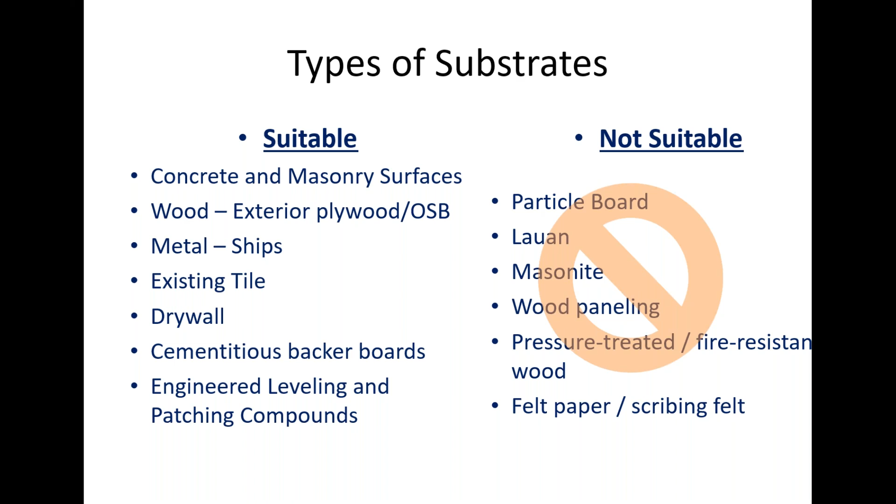What we do not want to install over are particle board, Lauan, masonite, wood paneling, pressure treated or fire resistant wood, and felt paper, scribing felt. For the most part, the reasoning is a lot of those products will swell, they can delaminate, they're not structurally sound, and they're just not suitable for tile installations.

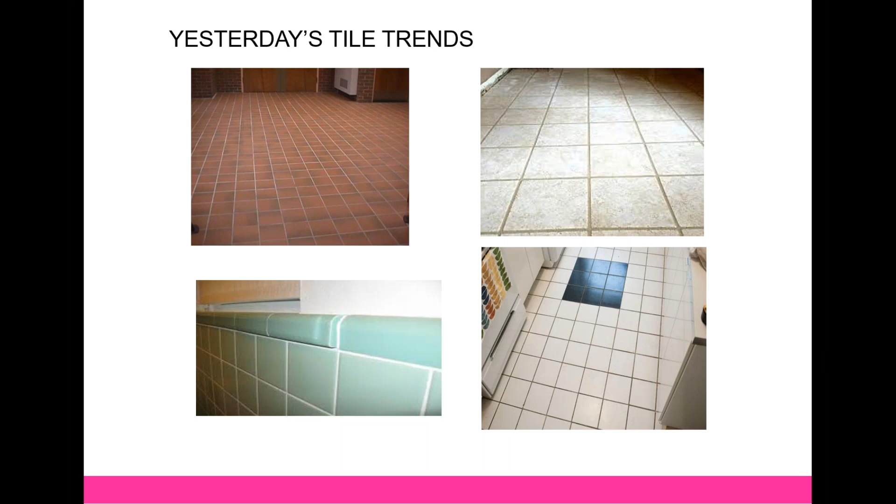So back when I started with my uncle in '94, we installed thousands of feet of 3x3, 4x4, 6x6 tiles on the wall. As for the floors, 8x8s and 12x12s were the norm, and the floors were flat enough to install on. When installing these smaller tiles, the substrates don't necessarily have to be as flat as they need to be today. But nowadays, 24 by 48 inch tiles or even larger are a common sight in production homes and commercial buildings. These tiles need a substantially flatter surface to install over.

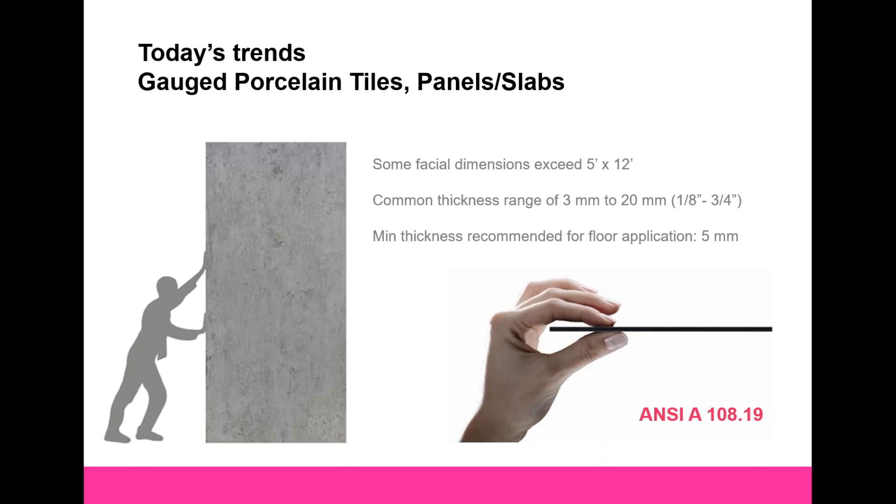The trend is bigger and bigger tiles. Like I mentioned before, we commonly see 24 by 24s, 24 by 48s, even larger tiles being installed in production homes and commercial buildings. Additionally, these tiles are getting thinner and thinner. As technologies improve, the prints are more realistic and tiles are getting much bigger. And as these tiles get bigger, the need for a flatter substrate is even more crucial.

Mortar coverage is even more important as well. We don't want any voids underneath these tiles more than 2 square inches with your mortar. So imagine a chair leg on one of these tiles, for example. That point load over that void, we're reaching 2,000 PSI. And then that one spot can cause a crack to start. And you get a crack in one of these larger tiles, and it's an expensive repair.

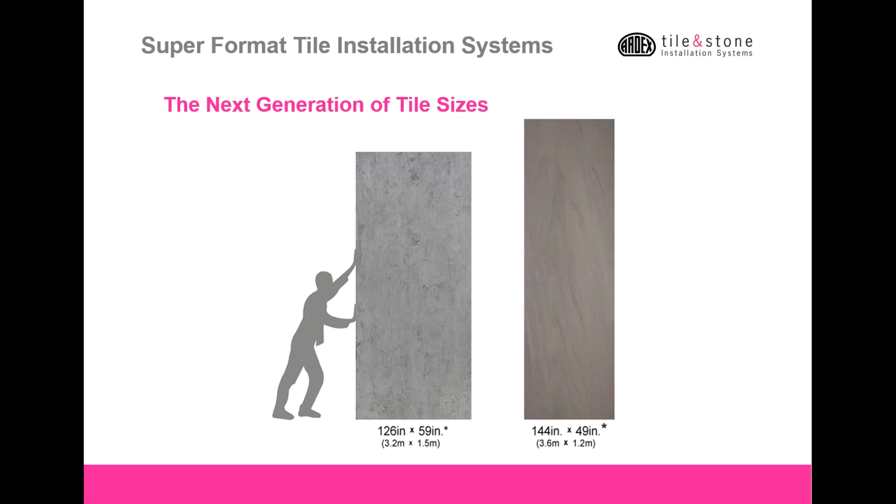So this is why it's so crucial to have a very flat surface and get your mortar coverage. Our standards tell us that we need the substrate to be no more than 1/4 of an inch in 10 feet for a tile installation. For any tile with any edge greater than 15 inches, we need the substrate flatness to be 1/8 in 10 feet, and as you can see here, we also need it to meet 1/16 of an inch in 24 inches. This requirement is in ANSI A108.19.

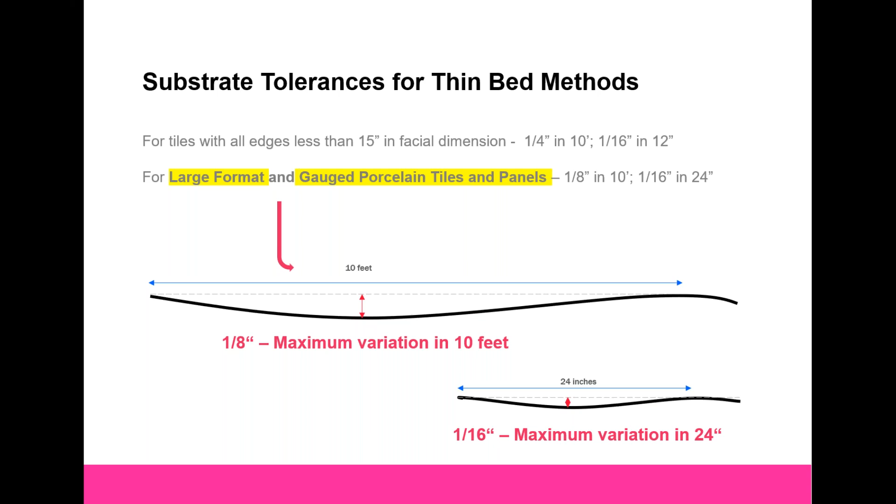Designers are specifying bigger and bigger tiles. Homeowners wanting bigger and bigger tiles. These tiles offer less grout joints, in return requiring less maintenance, less cleaning. These tiles span a greater distance over the substrate, and they do not contour or bend to that substrate like the smaller ones would. So this is another reason why we need a very flat surface to work on.

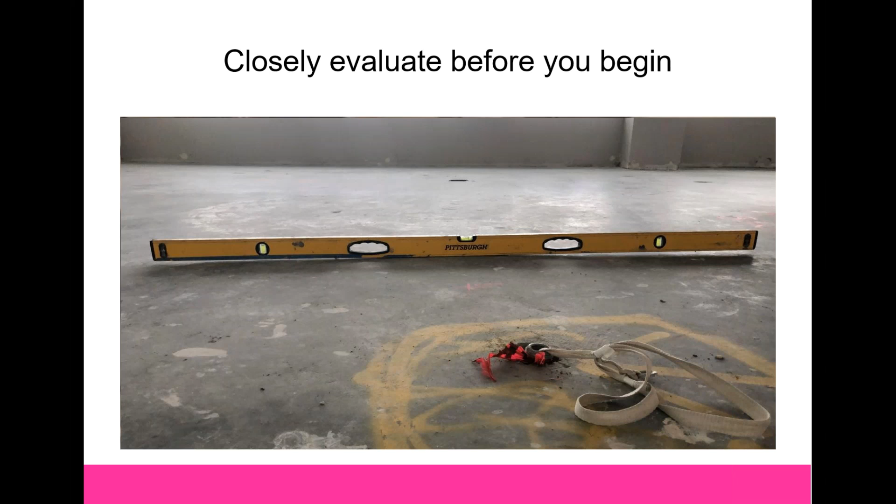By following proper prep guidelines, you will maximize long-term performance while reducing installation costs. More importantly, you will minimize costly callbacks and enhance your reputation as a quality installer.

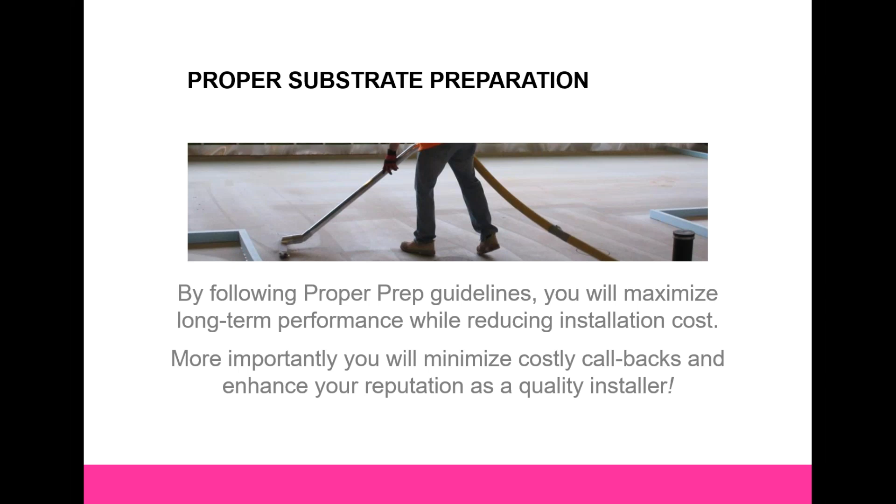Preparation, I should say, reduces perspiration. We have the 5 keys to a successful installation, which are critical. As number 2 is highlighted here, substrate preparation is one of those 5 keys to success.

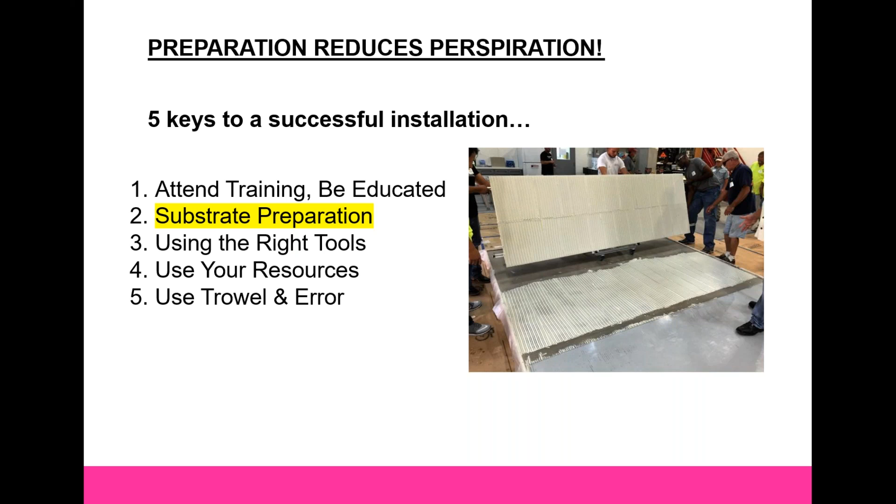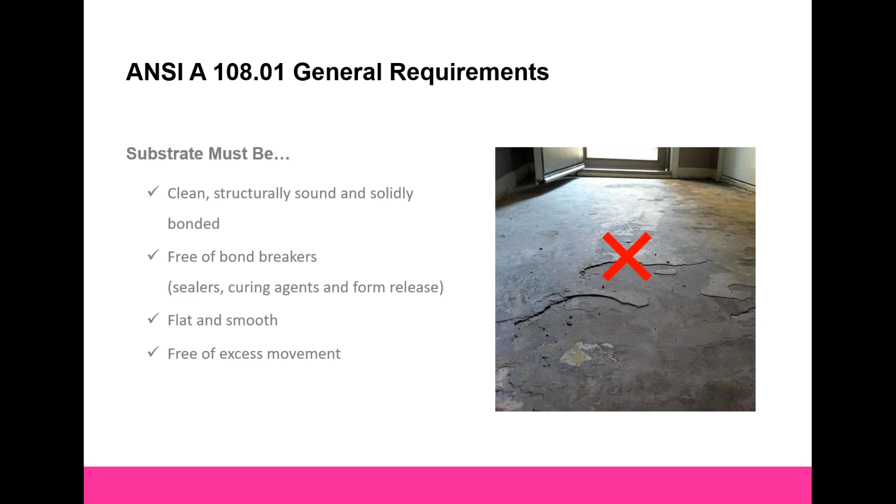The ANSI A108.01 general requirements state a substrate must be clean, structurally sound, and solidly bonded, free of bond breakers, sealers, curing agents, form release. It must be flat and smooth and free of excess movement. Once that is achieved, we are able to just spread the mortar and set tile. Taking the proper steps at the beginning will allow you to install faster and more efficient at the back end of the job. Not to mention, you will be within TCNA guidelines.

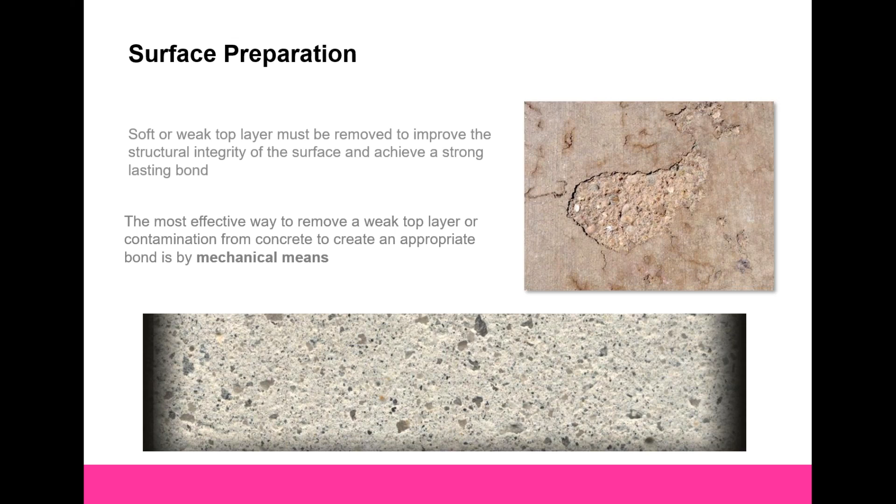We need to get to clean, sound, and solid. Any loose, weak material and soft top layer need to be removed. The most effective way to achieve this is by mechanical means, such as shot blasting and/or grinding. In locations where we have contaminants, we must always mechanically remove them. Release agents, paint, drywall mud, sweeping compounds, oil grease, asphalt tar, etc.

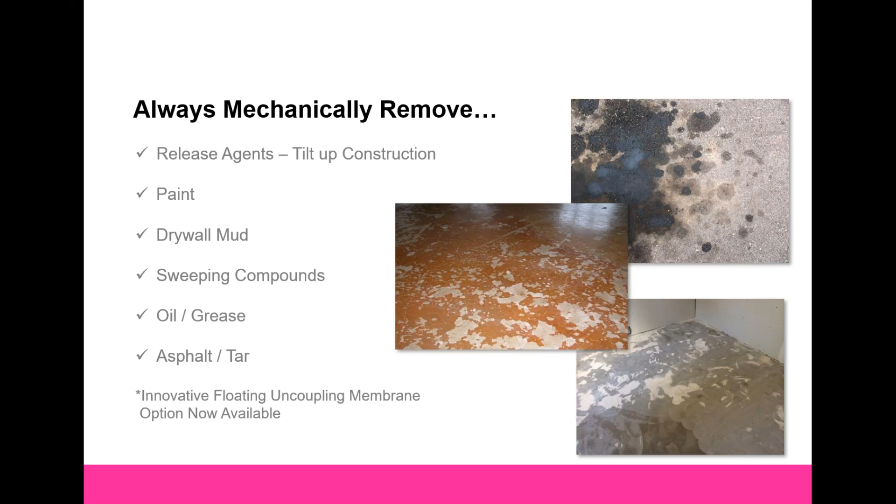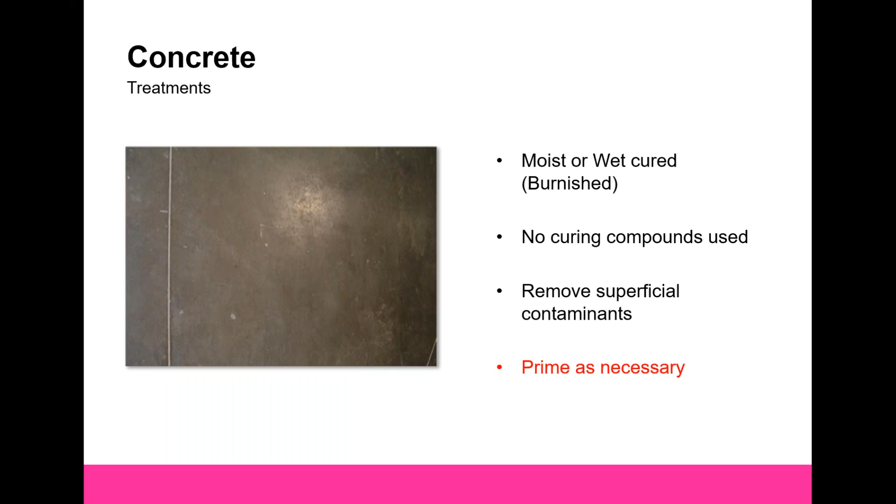Old adhesives, all of these need to be removed mechanically. We don't want to use chemicals. In situations with new concrete, it should be wet or moist cured. No curing compounds used. You should remove any surface contaminants and then use a proper primer if necessary.

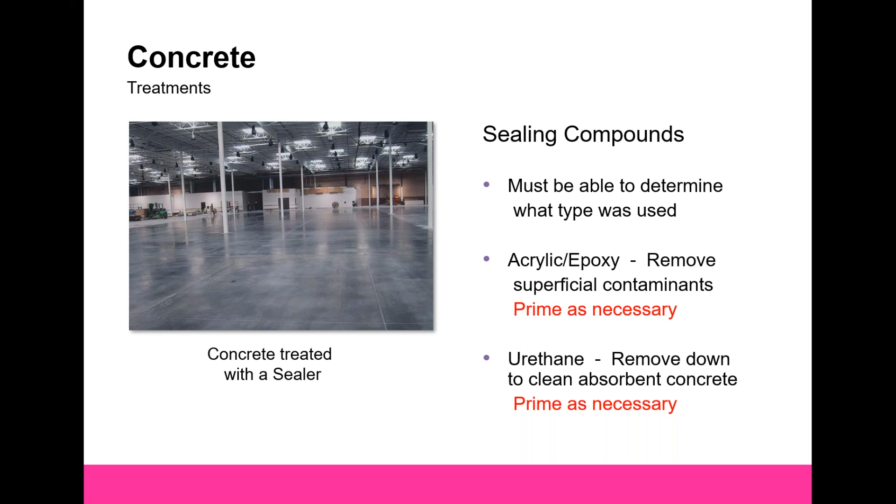If the concrete is treated with a sealer, we must be able to determine what type of sealer that is. Now if it's an acrylic, say, or an epoxy sealer, we just remove superficial contaminants and we can prime as necessary and install over that. If it's a urethane, we will need to remove that down to clean absorbent concrete and then use a primer as necessary.

Sorry about that. Thought I had that on silent. I apologize.

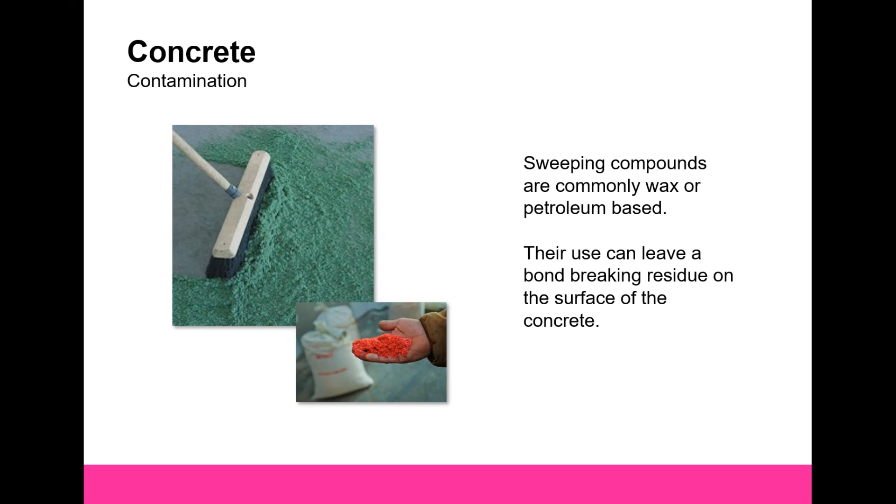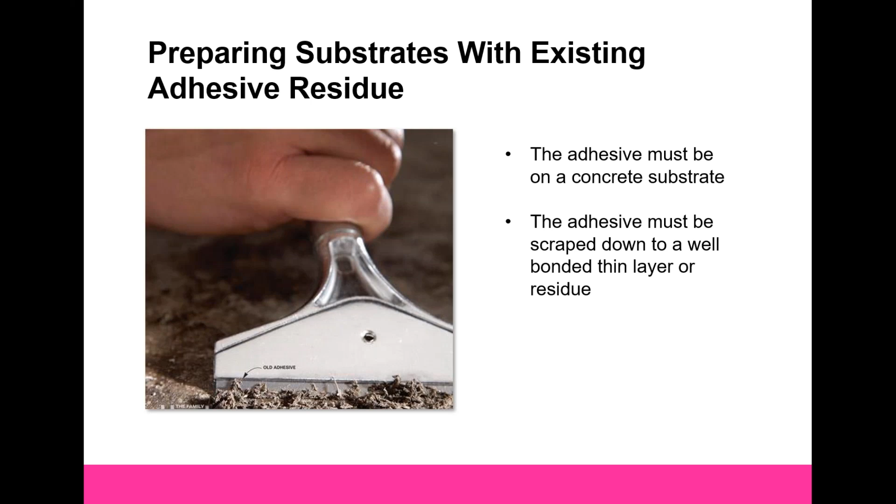Preparing a substrate with existing adhesive residue. For example, say there was a different flooring that was removed and it left some of the glue behind. When we are directly on concrete, we need to scrape that adhesive down to a very thin layer without any excessive buildup. We do not want to use adhesive removers to take that glue off the surface. These products get down into the concrete, they will eat the glue, and they will get in the concrete. Then when you apply a primer or a mortar, it will eat those too. So they don't really know when to stop. Always use mechanical means.

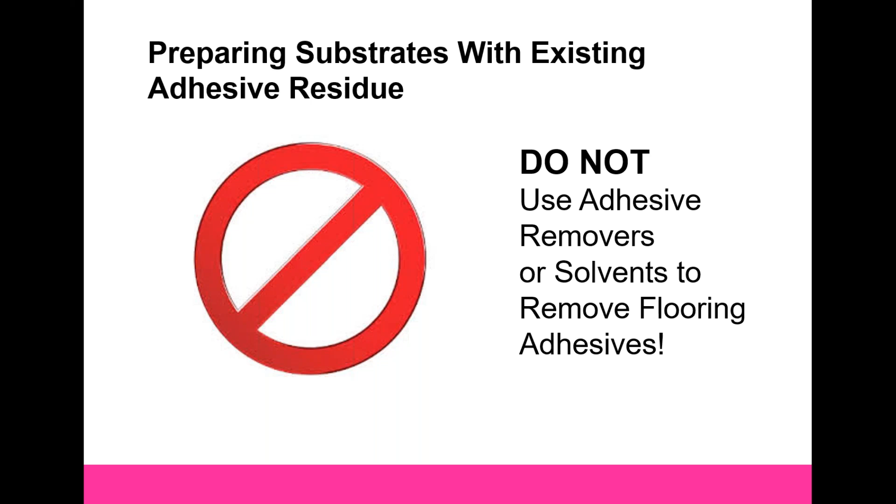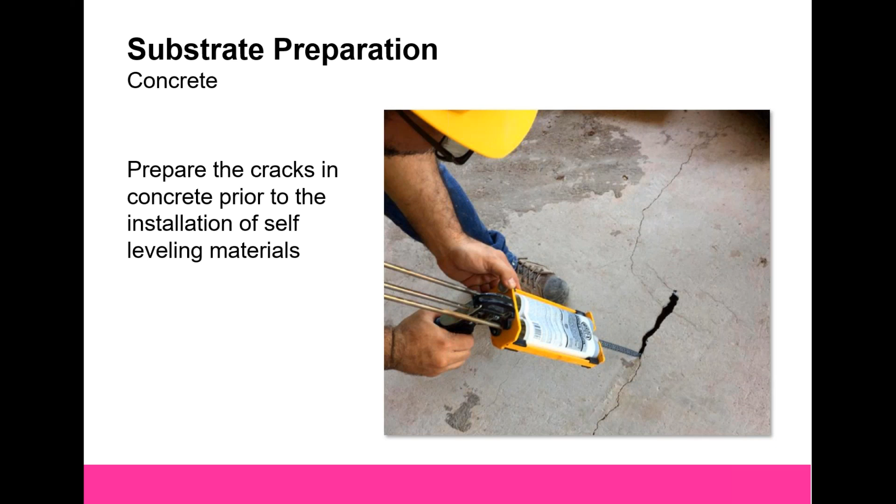In the tile industry, everyone's talking about anti-fracture products, and these are good as a precaution over a concrete slab that doesn't have existing cracks. The idea is that if and when cracks appear, these anti-fracture compounds allow for some movement without affecting the tile. But if you do have existing cracks in the concrete, repairing them might be the best option by mending that concrete back together. These are just examples of how you can address cracks.

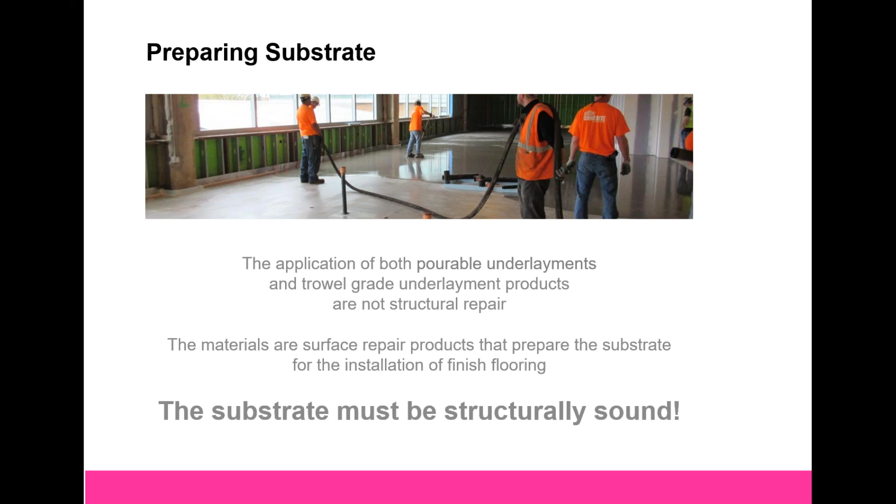Can they level a floor? Yes, if using enough material, you can get a floor absolutely flat and level. But for the most part, what we're trying to achieve is a flat surface.

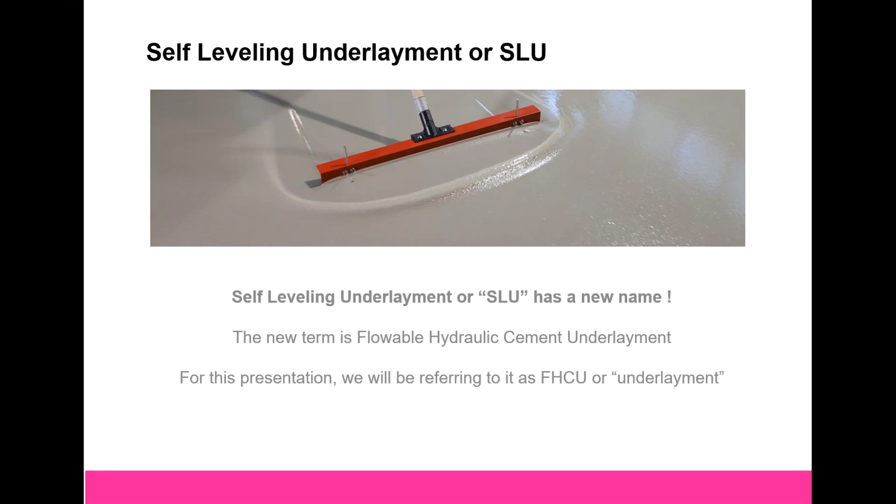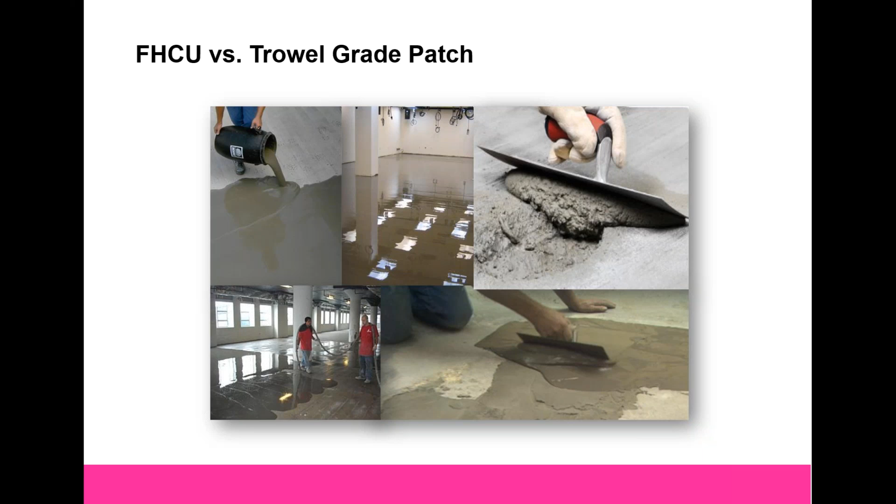So, flowable hydraulic cement underlayment versus trowel applied or screeded patch - several factors such as substrate, area, and depth of repair are just a few considerations when selecting a trowel applied repair or an underlayment. The type of substrate you're going over is also a major consideration. Are we going over concrete, wood, metal? Is there an existing floor? These choices affect your choice of repair products.

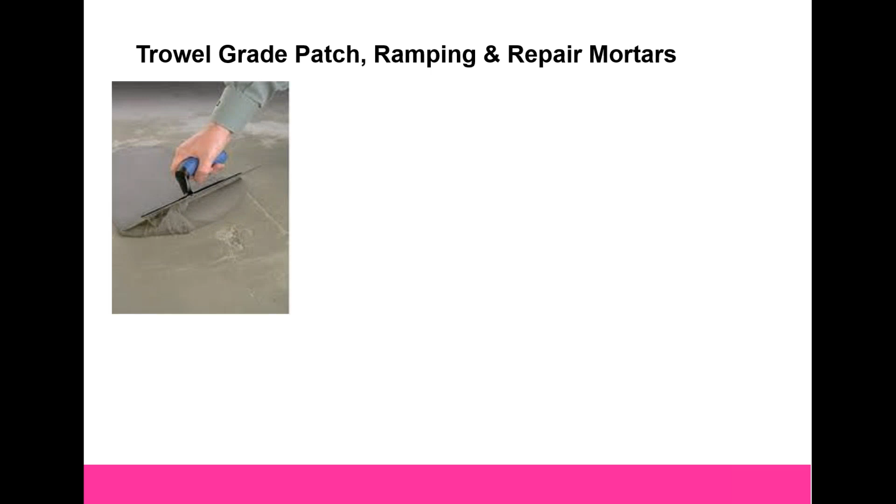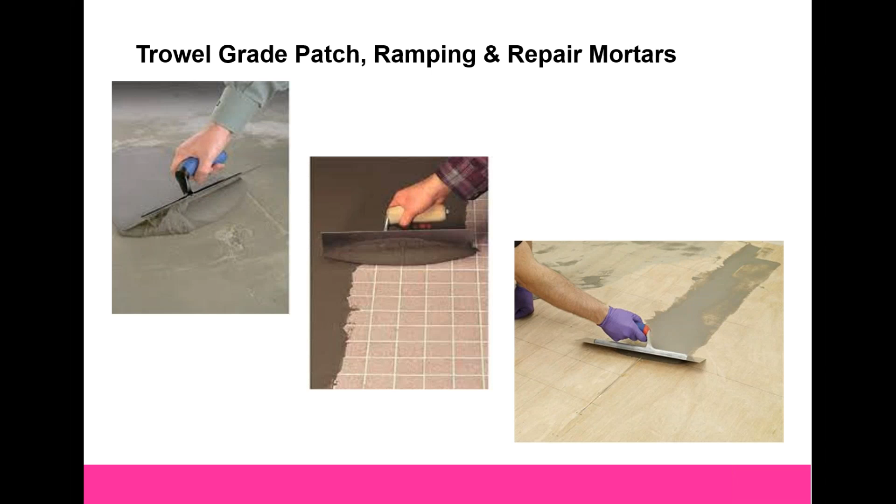There may be times where minor corrections can be made with a trowelable patch or even a ramping and repair mortar, such as spalls in the concrete. Maybe we need to smooth out existing tile, or fill seams in a wood substrate prior to pouring a leveling underlayment. Other times we may need to create a ramp, like a doorway from existing elevations or ADA requirements, possibly going up or down.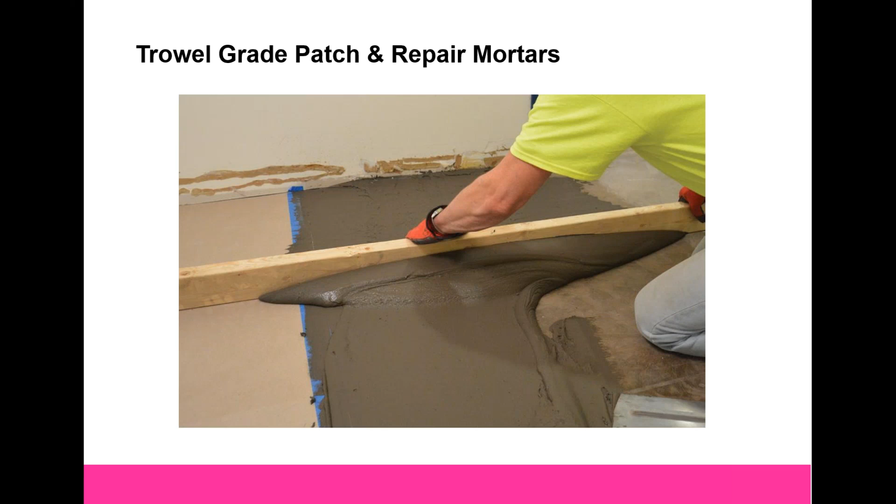Here we have a fireplace hearth that was in rough shape. The previous hearth was removed, leaving a very uneven surface. A pre-tile repair mortar was used to smooth this surface out to give a nice flat surface for the installation of the tile, or in this case a granite slab or gauge panel - something like that, getting that flat surface.

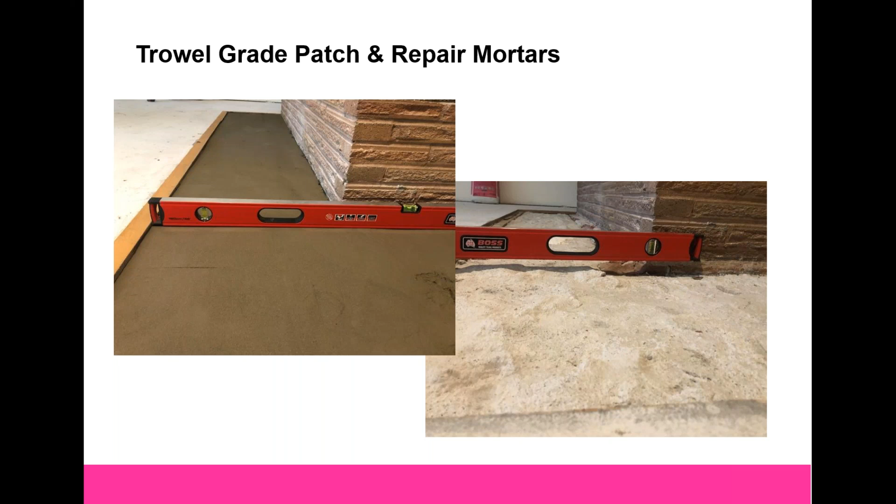Here's another place where a pre-tile repair mortar can be used, like this fireplace, to square and plumb it. Everything that needs to get tile on it needs to be flat and smooth.

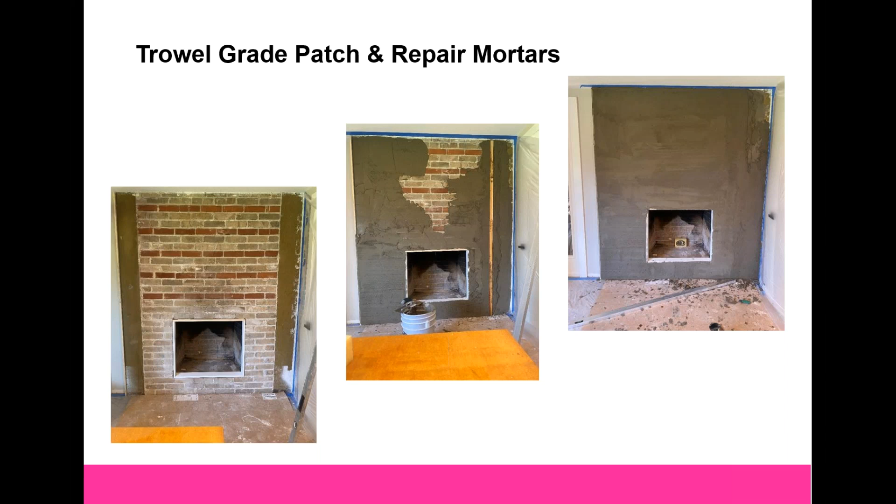In this case, the tile installed was very reflective. If you just look at the reflection in this tile, you can see just how flat that is - you see that door in the reflection of the tile, it's pretty flat.

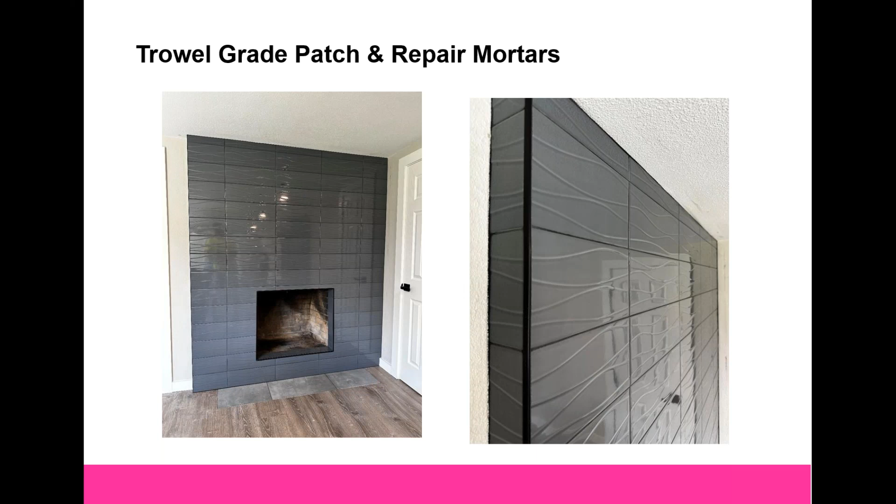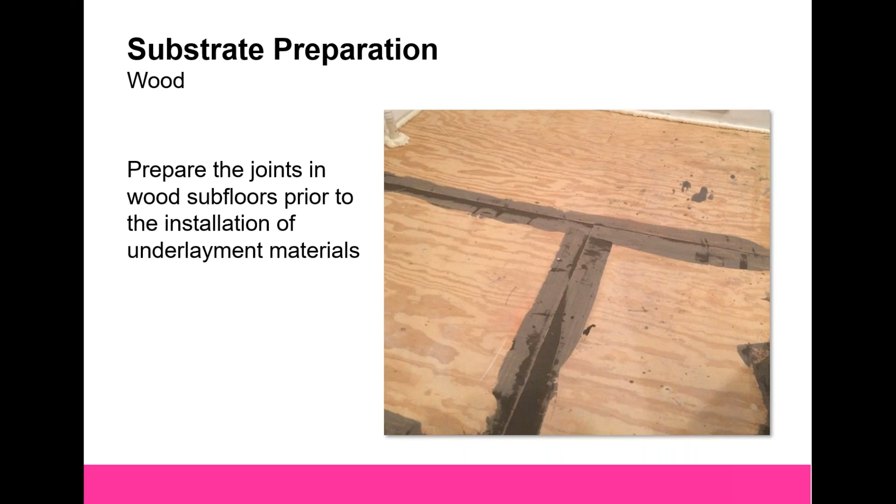When we have a wooden substrate, many times it's necessary to fill the seams and any voids with a trowel applied patch to prepare for the underlayment. You'll see in this picture where they fill the seams, and you can also kind of see around the perimeter some spray foam - we'll touch on that later. You also want to walk around the floor and look to see if there are any voids in the wood substrate from nail holes that were removed or anything like that. Because if you're on the second floor and you pour a leveling compound on top and it finds one of those holes, it is going to find somewhere to go underneath. So always take a look and look out for that.

So why prime? Primers do several things for us, such as preventing the substrate from pulling moisture out of the underlayment. They also extend the working time for thinner pours, giving you more time to work with them, and additionally they create a better bond to the substrate. Let's talk about that a little bit more.

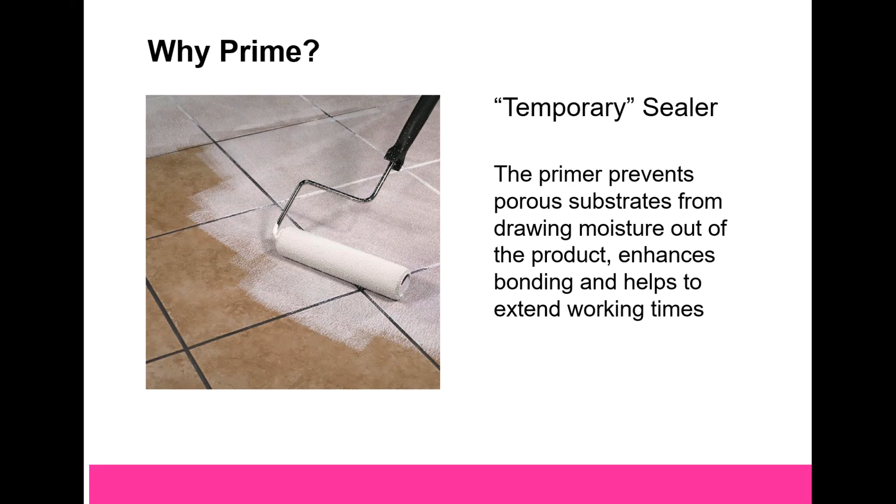When we are installing tile or pouring an FHCU over certain substrates, they can be overly porous. Substrates like gypcrete and drywall are very thirsty. By priming them with a proper primer, you will reduce the porosity in those substrates, giving you not only a better bond, but more working time with your mortar or your FHCU. Now, obviously, when I refer to the drywall, we're talking about on the walls, not on the floors, but you can absolutely prime drywall with a proper primer before the installation of tile on the wall.

I really like this photo. If you take a look at this picture, you'll see that the guy is putting the primer down with a broom. The recommendation is to use a broom to basically agitate the primer into the substrate, getting it down into the pores and picking up any residual dust that may be there after vacuuming. If you're going over a wood substrate though, a broom is not necessary. We would recommend using a roller, but I know most of you out there probably use rollers, but give this exploded tip broom a try once. It works really good.

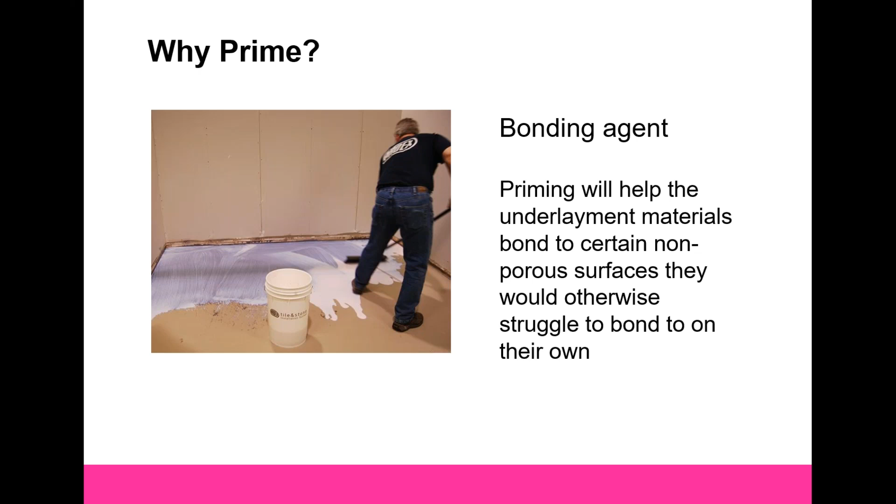So not all primers are the same. Make sure you have the right primer for the right substrate.

Flowable hydraulic cement underlayments are blended polymer modified cements with high flow characteristics. Primers can be single component, acrylic, or epoxy. Keep in mind, most underlayments will require substrate priming.

Pourable underlayments may be approved for directly over wood substrates, metal substrates, or concrete. Be sure to confirm with the manufacturer the technical data information. This is important because some of these underlayments may have significant tensile pull and are not all made for all surfaces. If you're not familiar with tensile pull, as these products cure, they grab onto the surface and they begin to shrink just a little bit, and they can have a significant pull. So if they're on a weak surface, they can pull themselves off the ground or pull up any contaminants under them, which is why we always want to make sure that substrate is clean and strong.

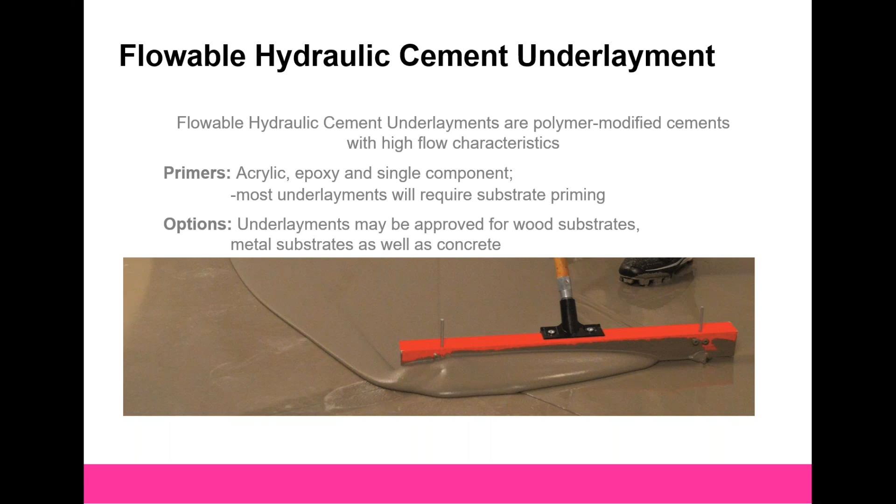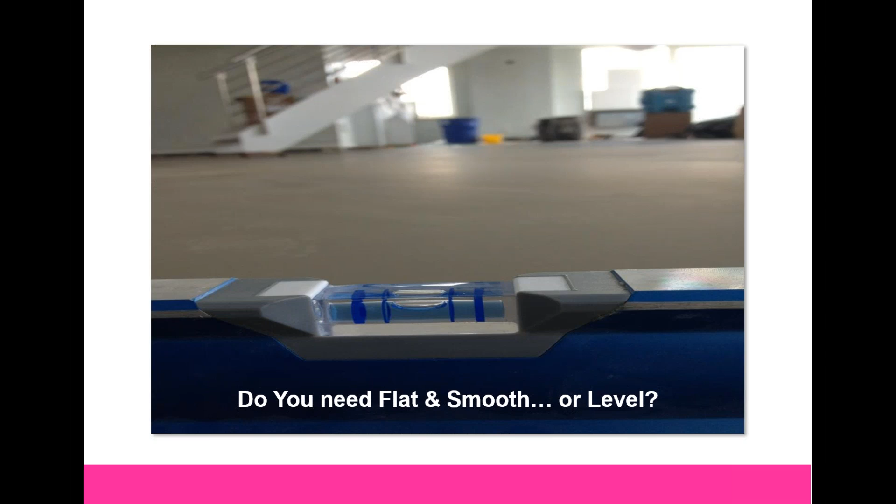So do you need flat and smooth, or do you need level? Sometimes level may not be realistic with thresholds and doorways, etc. In most cases, we are just looking for flat and smooth. We just want to meet that minimum requirement when it comes to your quarter and ten, or your eighth and ten for these larger tiles. You see right here with this electronic level, this is dead flat, 0.0.

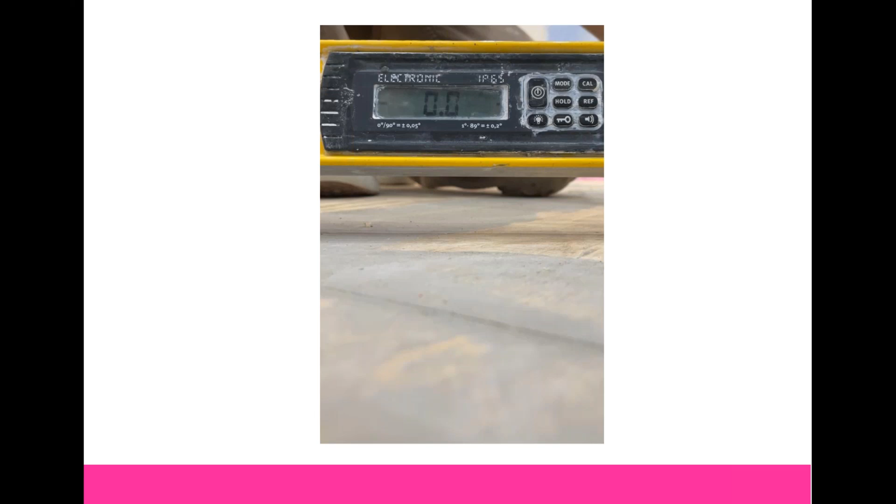Now, how do we know how much underlayment is needed? Maybe minor corrections, say an eighth of an inch to a quarter of an inch, you just got a rough surface. Maybe we have deeper gouges in the concrete and we need to get a little more thickness in there, maybe a half an inch to one and a half inches.

Larger areas that need deeper pours like this benefit from products with longer open times. So once again, every manufacturer is going to make a product that either is going to set up in just a few minutes or may set up a little bit longer, and every job may not be the same. Smaller areas, quicker pours, sure. Larger areas, you may need to get a product that's going to give you more working time so you can get in and out of the rooms, or in and out from where you're mixing.

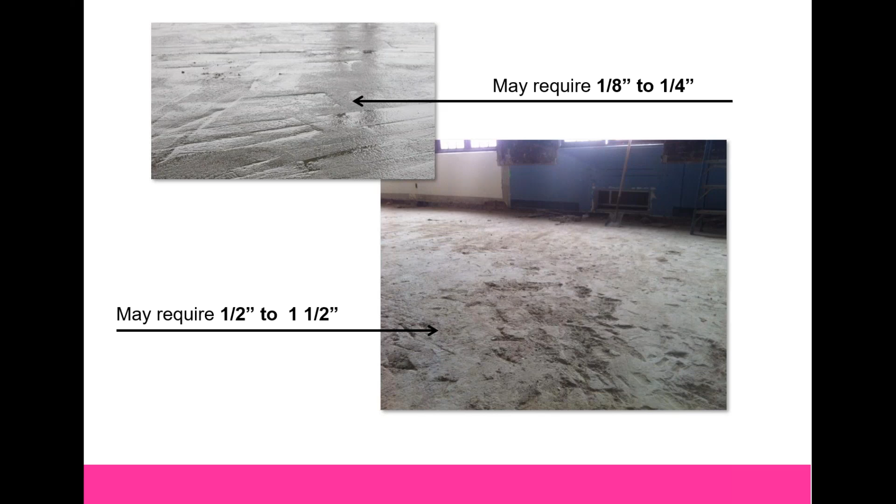Flowable hydraulic cement underlayment installations can help save time and money. By speeding up installation and minimizing effort on a perfect substrate, we are able to simply trowel out our mortar and set tile.

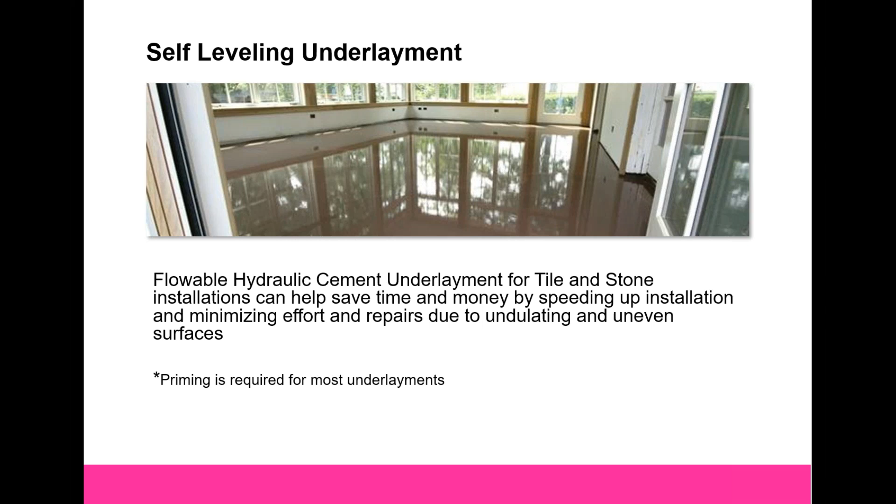High flow underlayments allow the material to go thinner and smoother, requiring less work. Heal is the ability for one batch or pour to blend into the next, or even to fill from walking across the wet material. If you're not familiar with putting down a leveling compound, you'll see in this picture they got cleats on. You are going to be walking through this material. Using the proper tools, understanding gauge rakes and smoothers, etc., are going to make that job a lot easier.

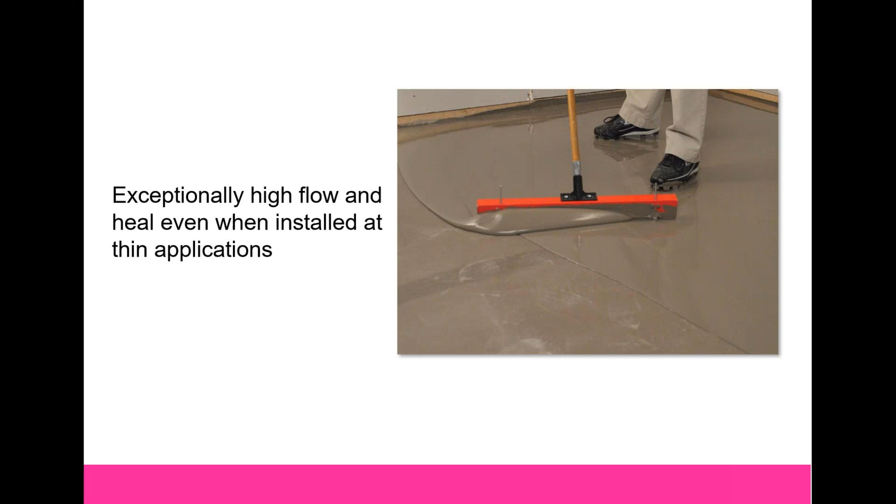It is super important to seal off all openings. We need to prevent any of the underlayment from flowing or escaping, thus not wasting material or maybe causing an issue somewhere below if we're on a 2nd or 3rd story, for example. Several options can be used to seal the wall to the floor connection, as well as around any penetrations like pipes and toilet flanges. Self-sticking foam, seal foam, spray foam, they're all useful tools to stop the flow from where you don't want it to go.

This also helps during the curing process and will help minimize cracking in the underlayment. Now, myself personally, I'm not a fan of spray foam. I can use it around certain areas because I'm not concerned with how thick it goes, but that spray foam can get kind of sticky if you're not being careful.

There are products out there, and you can see one of them in this picture here, that are made specifically to seal off around the walls, around toilet flanges, registers, etc. Some are self-adhesive, so they'll seal off underneath the wall and give you a 1/4 inch expansion. Just look at your distributors, ask them, ask a sales rep and see what they have for you to use.

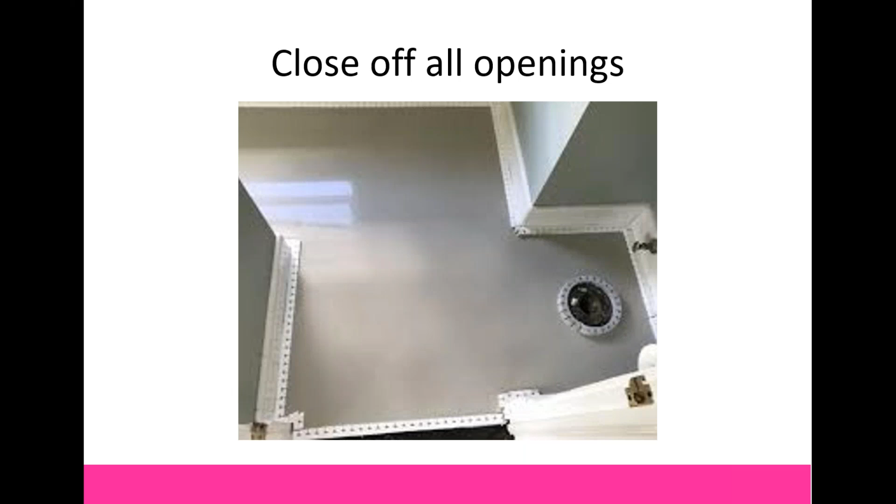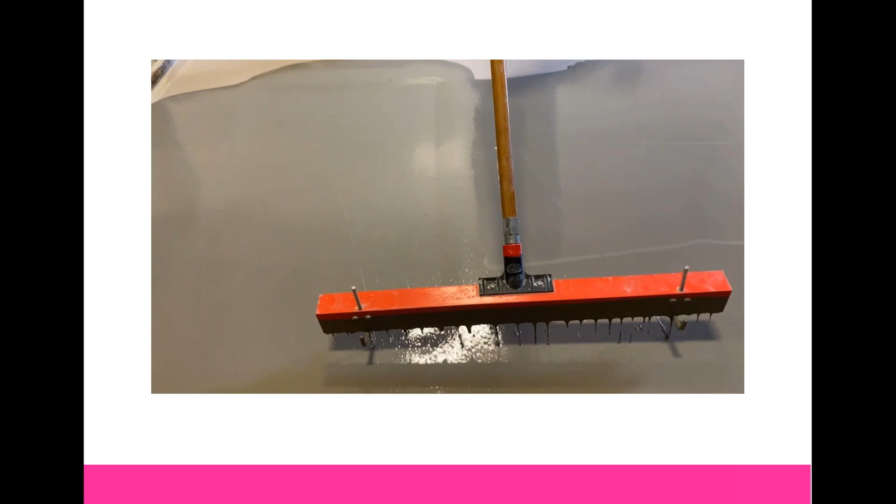So a couple of tools I want to mention is a gauge rake, and I'll show this little video for you. Breaking the line across the back for the same reason, making it easier to tie in the next layer.

Couple of tools: smoother, spike roller. Once you use a gauge rake, now that gauge rake is going to gauge how much material you're putting down. So if I want to put down a 1/4 inch, for example, I can set my gauges at a 1/4 inch and pull it throughout the floor and leave about a 1/4 inch.

But I also want to use a smoother or a spike roller to relieve that surface tension. Now, surface tension, what that is, just like water, it will be dry on the surface, for example. But breaking that surface tension and allowing where the air is touching that to relax, you're going to get a much flatter, much smoother surface. Both of these tools do that in different ways.

If you're using the smoother, for example, here on the left, typically you're going to use that when you're going more than a 1/4 inch thick, 3/8, 1/2 inch, or 2 or 3 inches, absolutely. The spike roller, it's really designed for when you're going less than a 1/4 inch, because pressing down on the smoother, it doesn't take much effort and you're touching the ground. You may go right through the material when you're going very thin. So a spike roller is a really easy tool to use to break that surface tension.

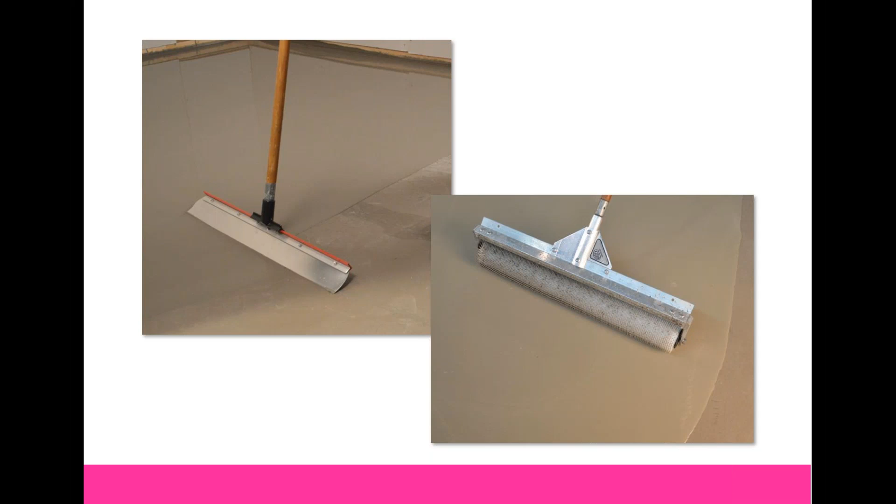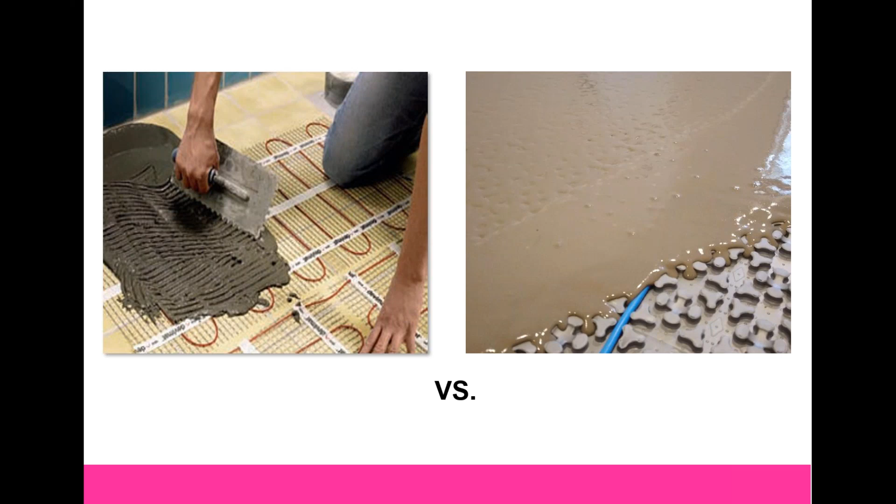Using a pourable underlayment over electric radiant heat wires, it's faster, creating a beautiful, smooth substrate and protecting the wires from potential damage, like the electrician, painters, other trades, even from your own tools. If you look at the picture on the left, and I've used that material before, you're dragging this metal trowel across these wires, where now with new technologies, we have mats that we can now put these wires into, then pre-fill them with a leveling compound, or pre-fill them with the mortar. And then you come back next day, they're completely encapsulated and protected from your tile installation, knives, trowels, etc.

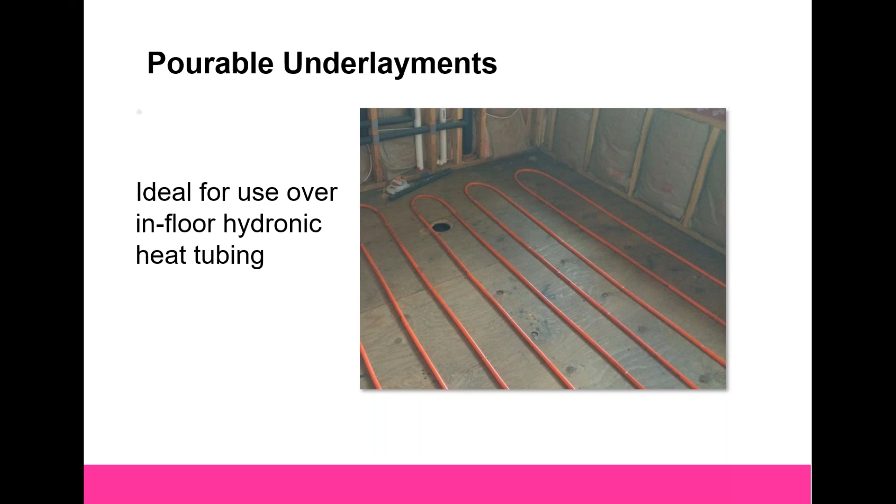Pourable underlayments are also ideal for going over hydronic tubing, such as what you see here. Always be sure the underlayment you choose is approved for this type of application. I can speak from experience that not all underlayments are. It's best to check with the manufacturer or their technical data sheet.

When we have a flat substrate, we can simply trowel out the mortar and set tile. Again, this is saving a huge amount of time during the installation and using less mortar. We're not picking up tiles, we're not buttering them up or spot bonding or putting more under there. A thin set mortar is just that. It is designed for a thin set application. But we should do all of our substrate prep prior to the installation of our tile.

Backer board or CBU, these products do not make the floors flatter, nor do they make them any stronger. If the substrate is uneven or out of level, these CBUs do not make them any flatter or any more level. You'll need to use a flowable hydraulic cement underlayment to achieve flat or level. Overall, they are more efficient and they result in a better substrate to install on.

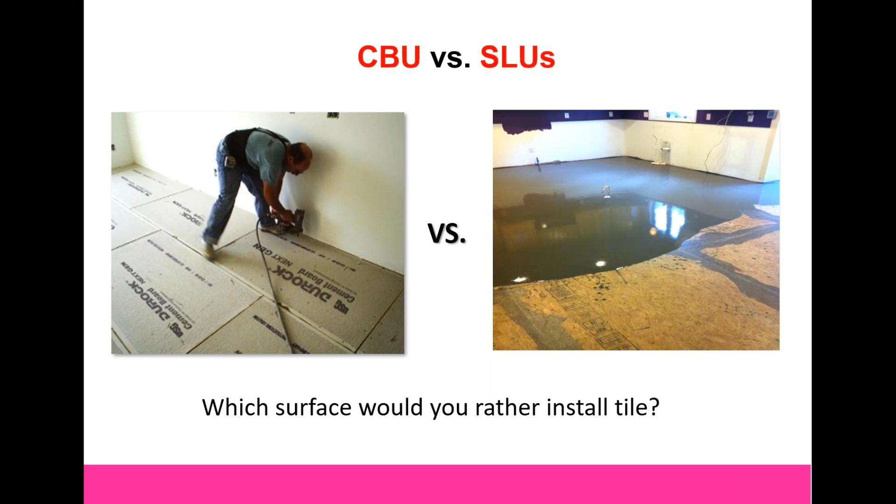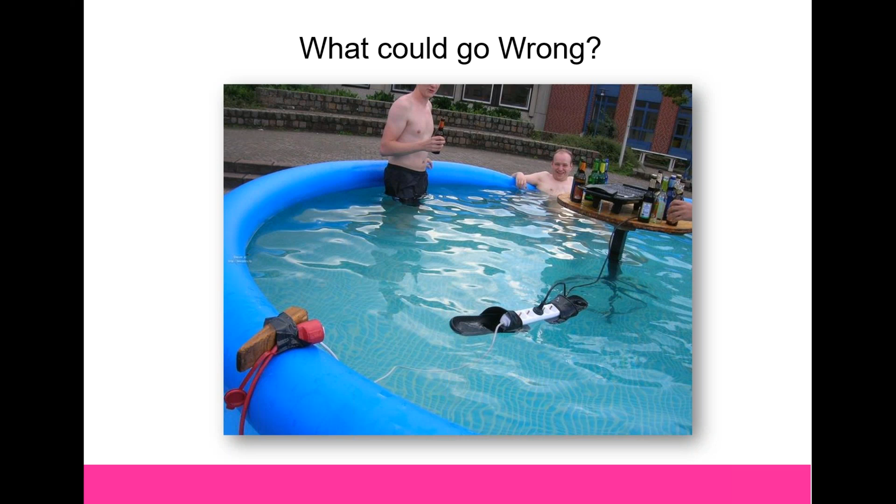Even with complicated situations like this, with multiple rooms and large open areas, they can also be tied together and perfectly smooth using the right material and the right amount of labor. I mean, who wouldn't want to set on that picture there to the right? It's like a perfectly flat, smooth concrete surface. I mean, seriously, what could go wrong, right? I know this picture is kind of funny, but the point is how many things are wrong in this photo? And just like a job site, what could possibly go wrong?

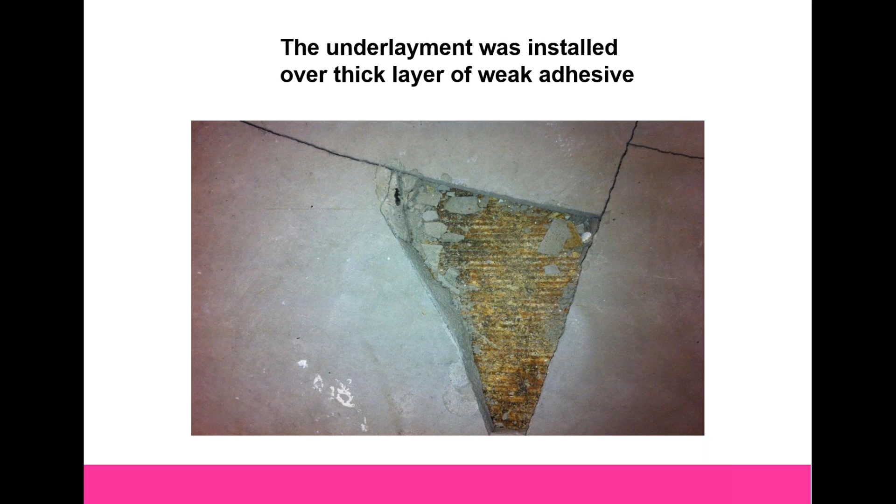So here is a pourable underlayment over installed adhesive. Installing a rigid cement product over a soft, flexible surface or residue will result in cracking and/or disbonding. The installer should have scraped down the glue ridges to a stain in the concrete before applying a primer.

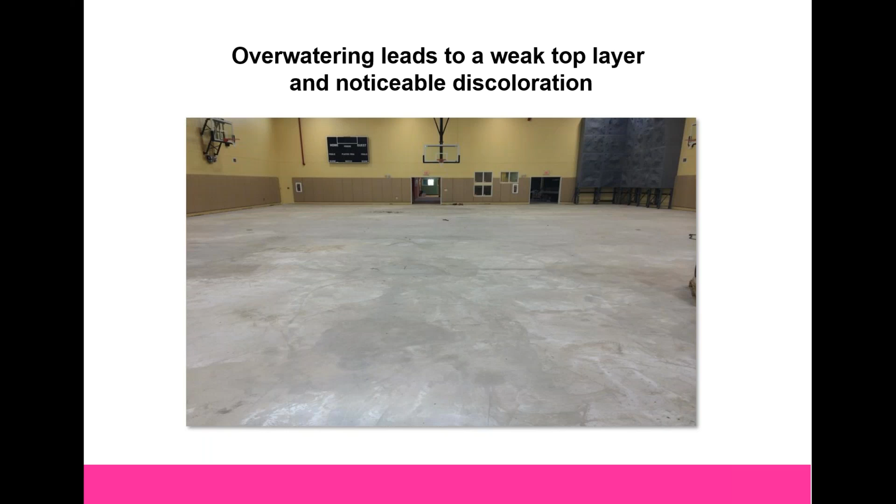In this case, the material was overwatered. The result is a very weak and powdery top layer and is not good to bond to. Another example of overwatering is a very soft, chalky type surface, and it's very easy to identify by taking a coin, a key, or even a thumbnail and just scraping the surface of it.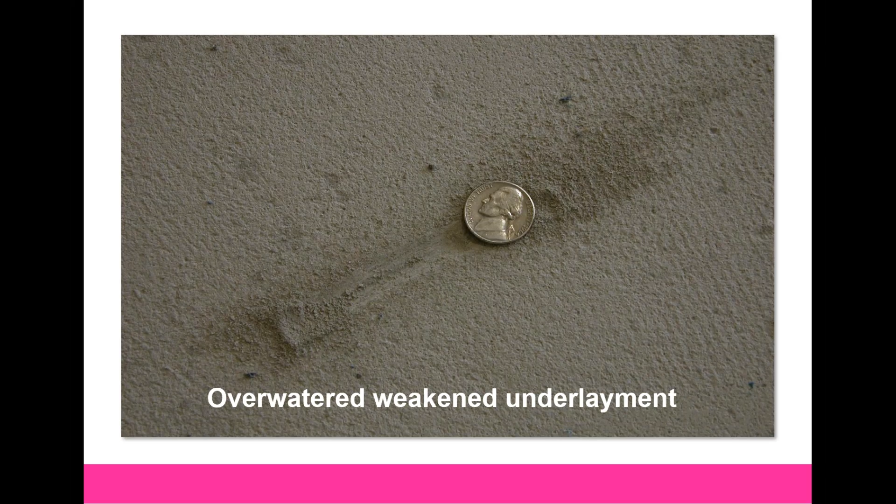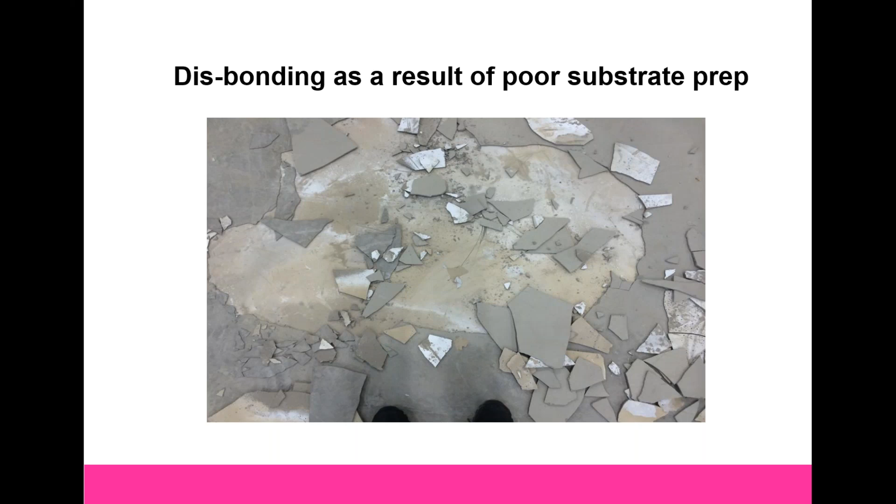In this photo, a total disaster that could have been avoided. They did a poor job on the substrate prep and they wasted a lot of time and a lot of money. You can just see in the pieces that are flipped over this white substance. Now, my first question would be, what is that white stuff? Because the leveling compound stuck to the white stuff, but the white stuff didn't stick to the concrete. And so that's a case of improper prep.

So sometimes when a deeper or thicker application is needed to build up the substrate, a screedable mortar bed is the better choice. Maybe the installer is not comfortable using a flowable hydraulic cement underlayment and just feels more comfortable screeding the floor. Maybe you need to create a slope which cannot be achieved with a flowable hydraulic cement underlayment. Whatever the case may be, for an unbonded screed, make sure you follow F111-24 in your TCNA book, and for a bonded screed, F112-24.

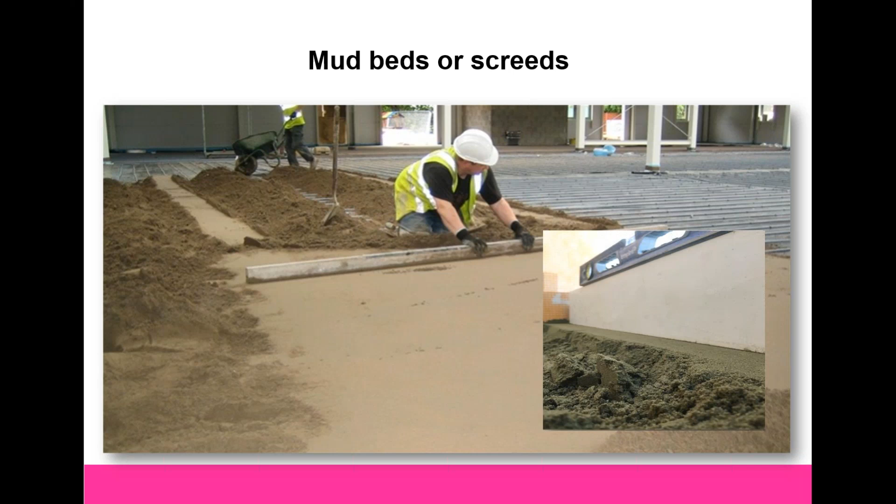And your final considerations: substrate prep is key to all tile and stone installation success. There's always a right way. Stay in tune with industry trends and best practices. Be aware of the inherent challenges and use your resources - industry guidelines, manufacturer technical services, supply partners, NTCA trainings, etc.

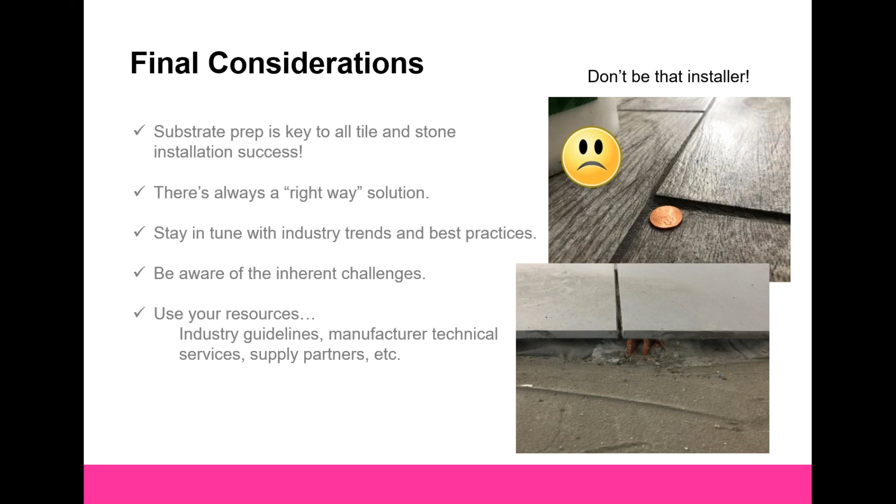Remember, lippage tuning tools or using more mortar under the tile are not suitable replacements for proper prep. Make sure your substrate is flat, without contaminants, and use the right primer when necessary before any tile installation. Remember the old quote, an ounce of prevention is worth a pound of cure. Whether you need a leveling compound or a mud bed, proper prep is always the best practice. Be disciplined, use your resources, use our industry standard as a guide, and do the right thing every time.

And that is it for my presentation.